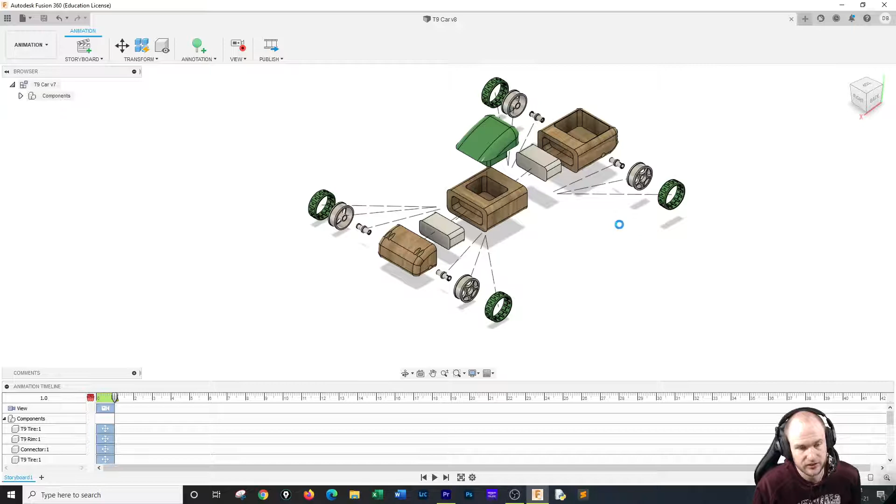And this is where if you capitalized everything, your life will be easier. And if you didn't, that's okay too, we can fix it in here.

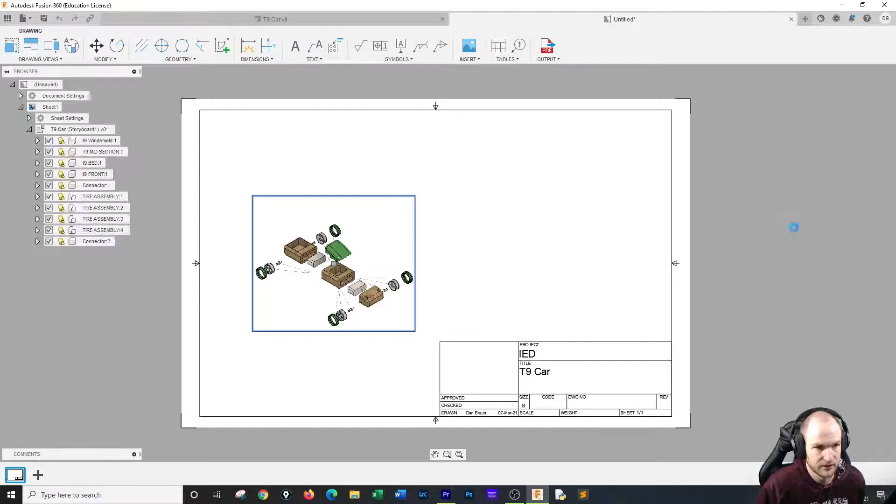Okay, so T9 car, there's our assembly. It looks great. I'm going to put it in there, the scale looks fine at 1/4, it's not too crazy. I would like it shaded, so I'm going to come back in and throw the shade on there. And then I'm going to do a base drawing.

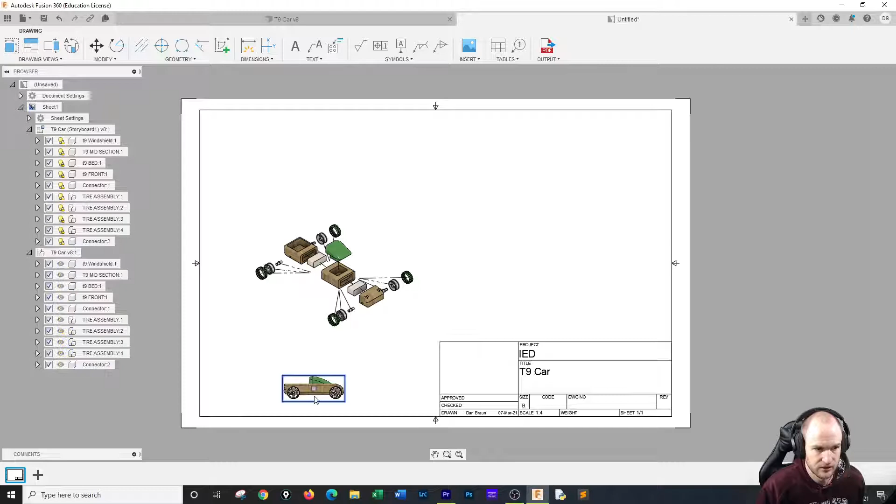And we could do this however we kind of want. Typically, we would do the isometric. I kind of like putting that down there though, doesn't that look good? Like, no reason for it, I just kind of like having it there.

But yeah, what I was coming in here for is I wanted - not that one - which corner isometric? Northeast? Wanted the northeast corner isometric in there.

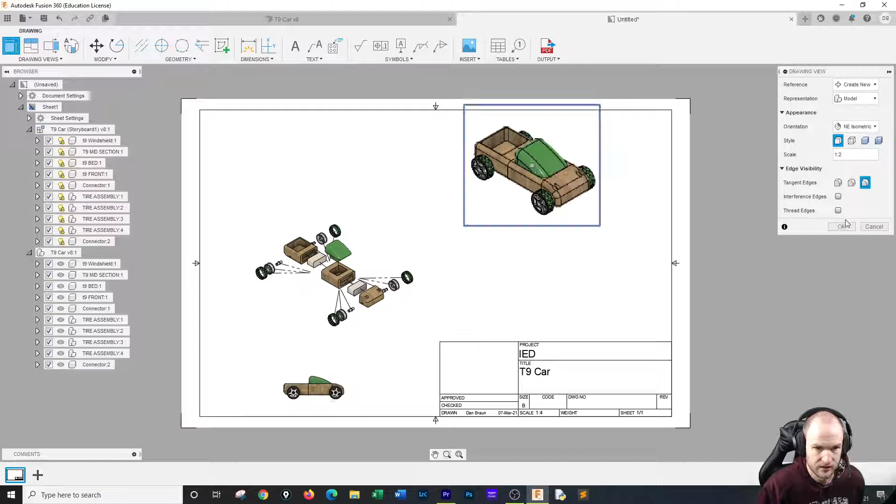Maybe up here, maybe like 1/2 inch. Right there, get that in there. Let's shade that too.

I'm going to remove this now because it's just silliness, we really probably wouldn't have that. Let's see if we can get this in here at 1/2 scale, how humongous that might be. I think we can make it work.

So I'm going to hit close and we're going to make it work. I think we can get this in here with the parts list. I want the parts list from that.

Let's see if I can get it in the bottom corner. I hate when it does it this way. I want the table to go down. I don't want description. Okay, that's better.

And I've got an issue with the table from making the sub-assembly, so I'm going to change it to all levels, because then it'll show that and what things are. And hit close.

I'm going to have to hit the move tool. Move, I want to move this. I want to move it here to here. There we go. Hey, and what did this do?

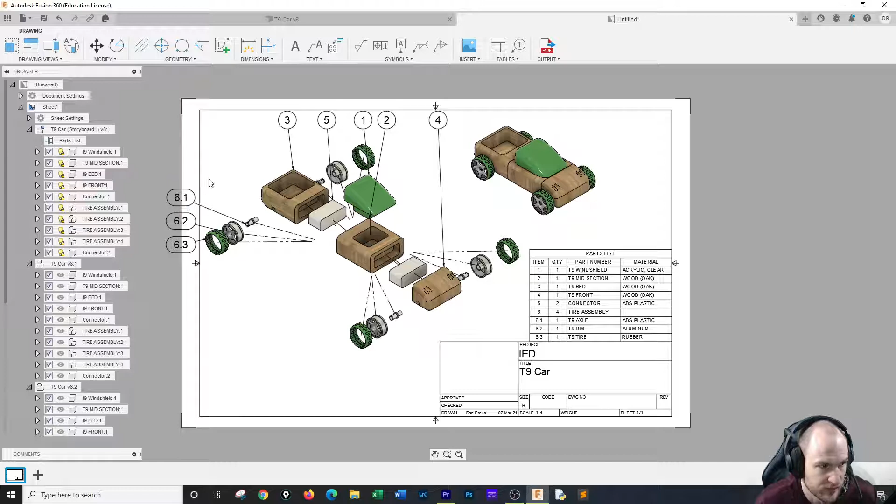So we have the tire assembly, which is 6, and you see it creates like a 6-1, a 6-2, and a 6-3, showing that it's all part of the assembly. I have to just come in here and clean this all up and make it look better, but I don't think that's going to be an issue. But it is nice to have the assembly, and it shows everything in that sub-assembly is like 6-1, 6-2, or 6-3, which I kind of like.

I think that's a good look and a good way to do it. Okay, so I'm trying to do some of these so they're not going through the pieces, because obviously we do not want that. Like I could get this down here without getting interference.

Right there, that's fine. This is okay, but it can move in closer. Actually, it might be better over here, it's not interfering with anything. And, you know, just ever striving to keep things neat and orderly as possible.

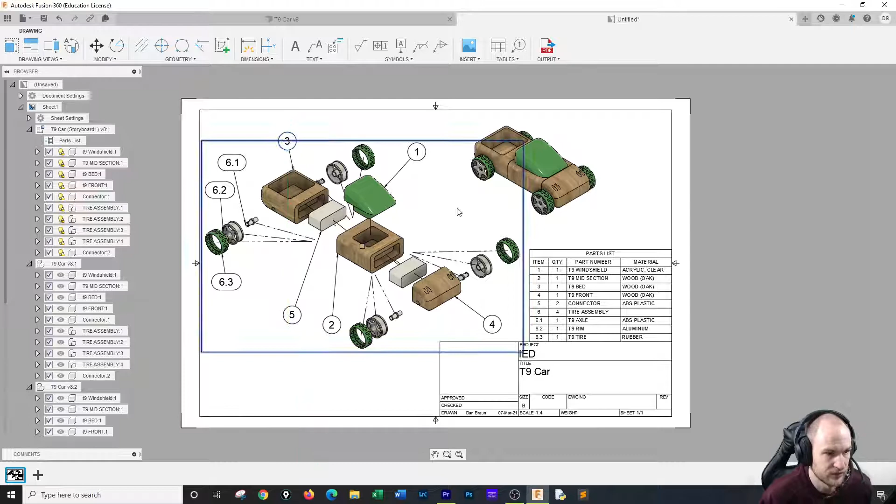So there we go. Your fully exploded T9 car, everything all capitalized. It's okay to have the tire assembly line in there for 6 because we have the sub-assembly drop down here. These are all the materials we should have.

So everything for your material analysis should be right here. And after you do this drawing, you would submit this, and with this we do the material analysis. So you shouldn't do that until you're all done, and all your materials should match what is in here. So like acrylic clear, wood, oak, oak, oak, ABS, plastic, aluminum, and rubber.

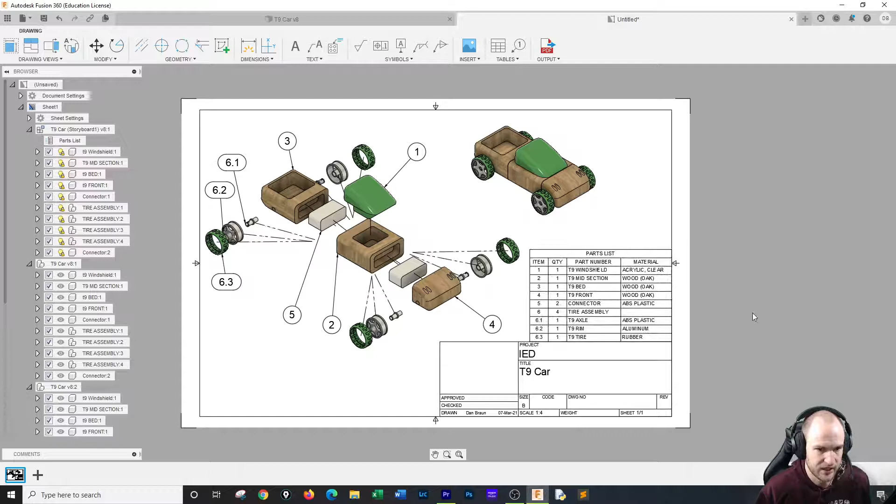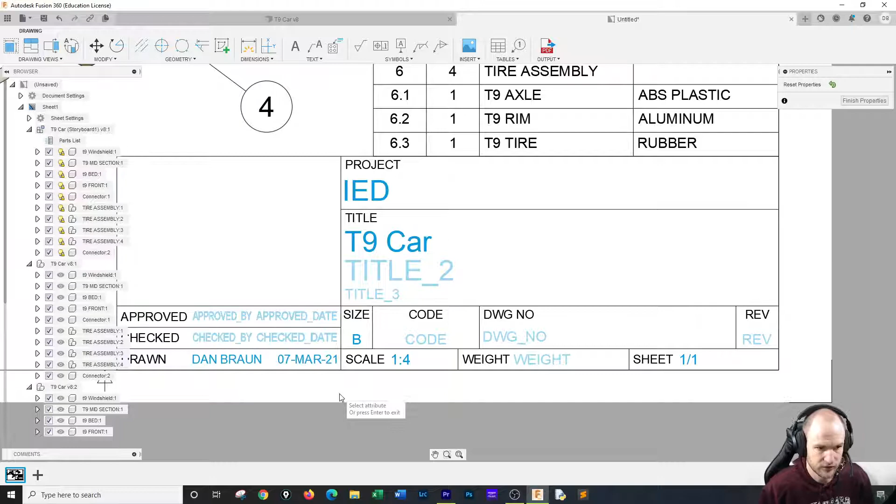So that is it. You know, I do hate this, so I always have to come in here and just fix this up, as I'm sure you do too. But I usually don't knock you on that one. Okay, so there we go.